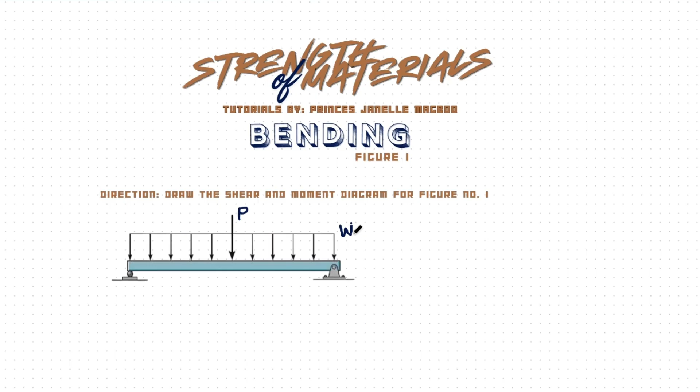So before everything else, let us name the loadings, reactions, and all of the necessary components of this diagram. Since this is a point load, let us label it as P. Next, we have here our distributed load, uniform distributed load. So we could call it W0. So we have the length here. Let us label it as L.

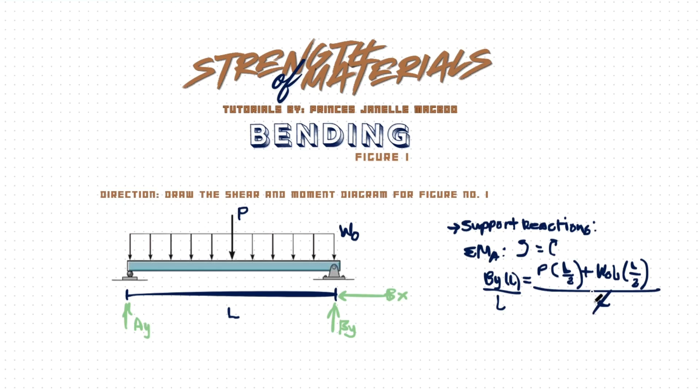Then, we'll have BY is equal to P plus WO L over 2. So, we already have the value for our BY. Ano? So, kailangan pa ba natin i-compute si AY? Well, if gusto niya i-compute, we're free. But then, as we have a symmetrical figure, it could be assumed here na yung value ni BY is also equal to AY. So, lagyan na natin dito na equal din siya kay AY.

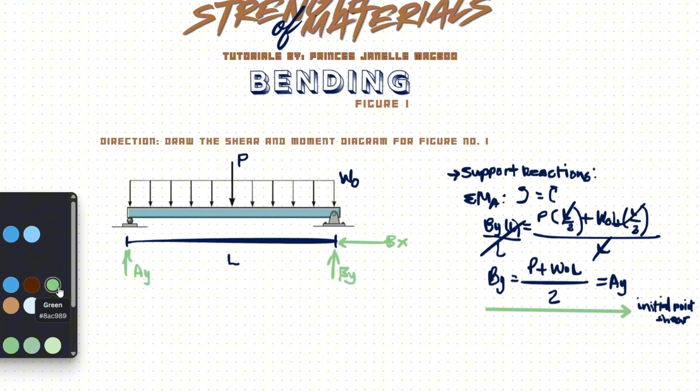So, we are now going to proceed to our shear equations. So, before that, what we have to do is to make a free body diagram for both sides of this figure. So, bakit po kailangan pa natin gumawa ng free body diagram? It is because magkakaroon po tayo ng cut sa ating figure. So, saan po tayo magkakat? When we say shear, ang cut niya daw is diagonal. So, ang cut natin dito could be like this. Okay? So, ito po yung ating cut.

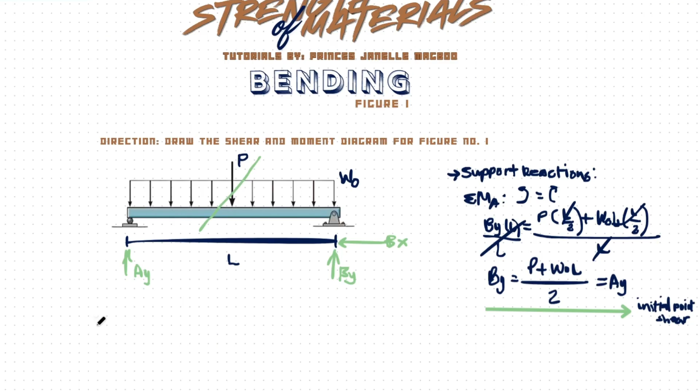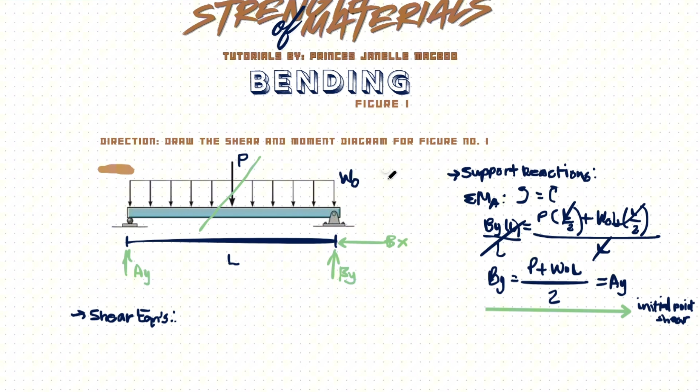And then, since ganito yung cut natin, we can have our free body diagram. So, let us label this as our shear equations kasi this will be essential for our shear equations. We'll have our free body diagram for the left side. So, ito yung left side natin and this one is the right side. Left side natin, it's going to be represented as the beam. And then, we have our reactions. We have here our AY. And then we have here our distributed load.

So, yung distributed load natin, hindi na siya WO kasi hati na siya. So, let's consider this as W. And then, ano mangyayari dito? Lalabas na yung mga internal forces natin. So, we have here our vertical and our moment. Okay? And then, our distance. We can represent this as X, or would be also equal to L over 2, since we're going to divide it naman. And then, okay na tayo sa ating left side.

Let us now proceed to our right side. Lagyan natin dito na L, and then for the right side, R. So, we have here our beam. Next, ang ating mga distributed load. And then, ang ating reaction dito, BY. And then, ang ating internal length. So, ano pang kulang? May kulang pa ito dito.

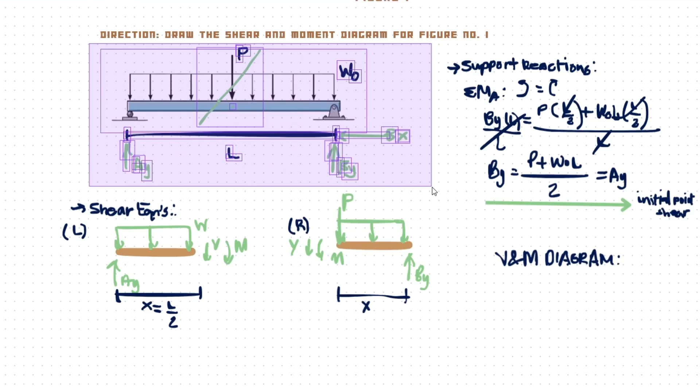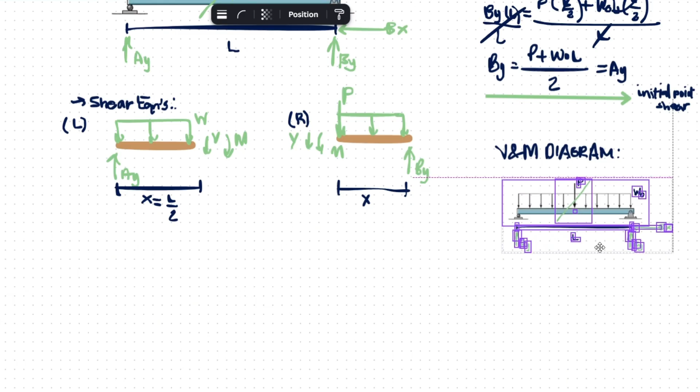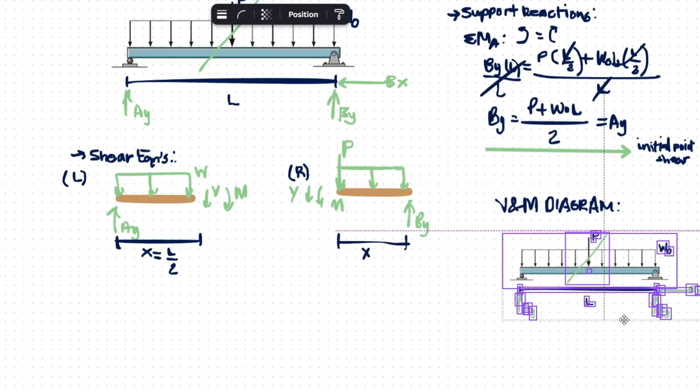And so, next, for our shear and moment diagram, pwede natin siyang i-copy. So, ito ang ating diagram. Palakihin natin siya ng konti. As you can see, nasa taas po yung ating figure. And then, sa ilalim nito, ilalagay na po natin yung linya para sa shear diagram. So, ito po ang ating linya for our shear diagram.

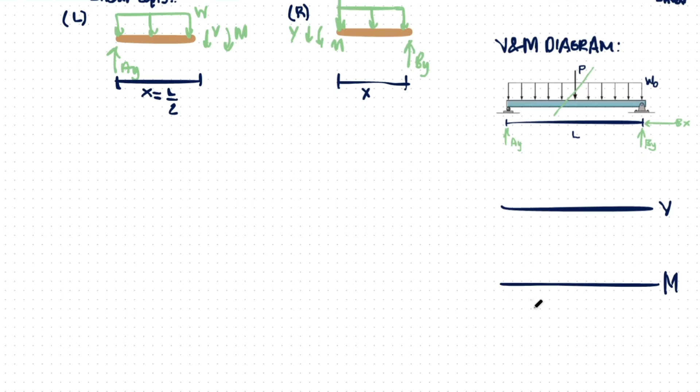So, let us call this as V. Let us label it. And then, we have our M, or the moment. So, ganyan po yung itsura ng shear and moment diagram kapag wala pa siyang nakaplot na mga coordinates. So, later on, as we go on to our solutions, mapi-fill in na yan yung ating diagram.

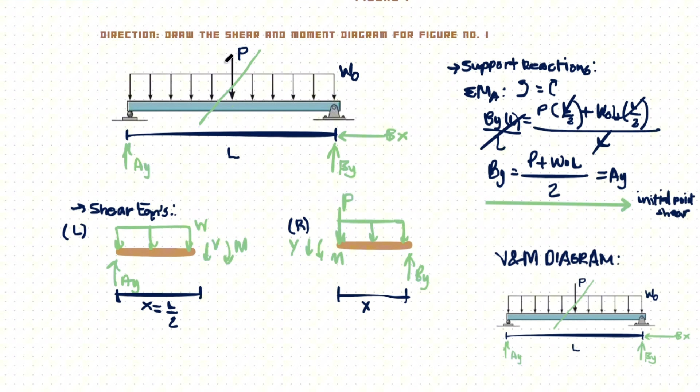Lagyan na natin ang coordinates. For now, let us proceed sa ating shear equations. So, ang kaibahan nito sa mga other examples natin is meron tayong given na point load. So, dito, hinati na natin both sides, and by paghati natin both sides, magkakaroon tayo dito ng solving for the equations of both sides din. Kasi, para makonsider natin paano nagbe-behave yung one side and then the other side as well. Kasi, yung point load natin is nasa gitna.

But if the point load is here, then that is just the same thing. Ang i-consider lang natin is, laging kapag may point load tayo, kapag nag-cut tayo, dapat makonsider lahat ng mga reactions and then the loads na given sa atin. So, dapat both sides, gagawa tayo ng equation para makonsider ang behavior ng ating diagram. So, for the left side muna tayo. Left side ng ating shear equation. So, lagyan natin dito left side.

Ayan, parang hindi tama dito. And then, ang left side natin, i-analyze muna natin ito. So, since ito si X, dapat yung V natin, ito yung V. So, yung value ni V ay makuha natin through summation of forces. But then, we also have to consider itong ating distance. So, paano natin gagawin yan? I-analyze natin yung distance natin na L over 2.

So, meaning yung X dapat mas mababa siya kay L over 2. Meaning, hindi siya dapat lalampas kay L over 2, but also, greater than or equal to 0 para ma-achieve natin ang right slope ng ating diagram, okay? So, we can have a range here. So, 0 must be less than or equal to X, and X must be less than L over 2. Well, it could be equal then.

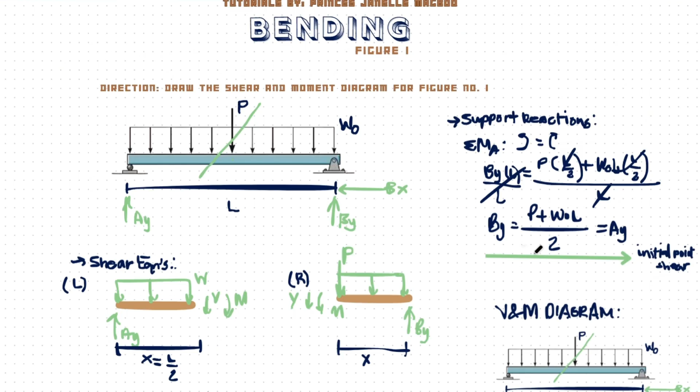But, we also need to substitute the value of AY. So, ano ang value ni AY? Balik tayo. Sabi dito, si AY ay equal kay BY, which is P plus WoL over 2. Okay? So, rewrite lang natin siya. So, we'll have V is equal to P plus WoL over 2 minus WX.

Okay, so meron na tayong shear equation for the left side. So, pwede natin siya pangalanan as, ayan, ito na lang, itong ating equation.

So next tayo. After ng left side natin, pwede din tayong mag-consider ng ating before midpoint na coordinate. Kasi, hinati natin siya sa dalawa. So, we can have here x is equal to L over 2, since i-consider natin yung midpoint. So, let us just label this as before midpoint. So, we can substitute x to L over 2. Kasi yung gitna yung hahanapin natin.

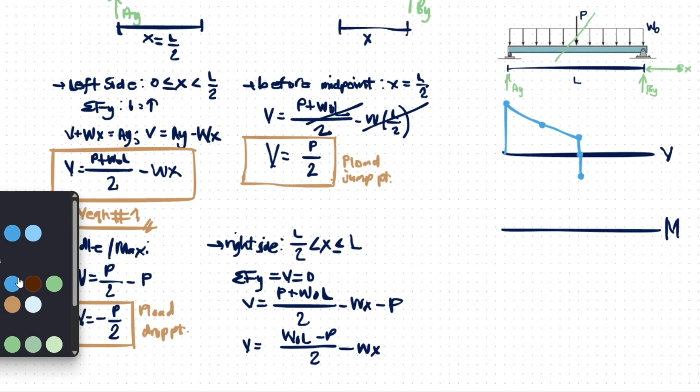and then, there, that's our V. But we can also simplify it further. So V is equal to - what is our V? We have W OL minus P over 2, and we have minus W X. So this is our shear equation number 2.

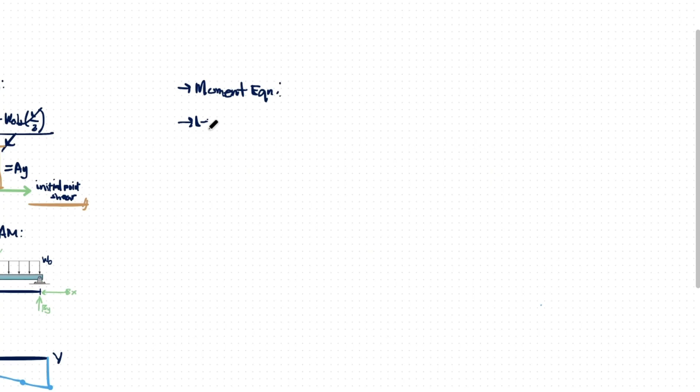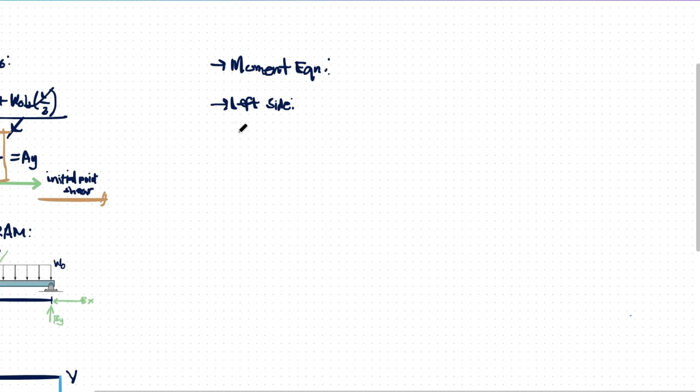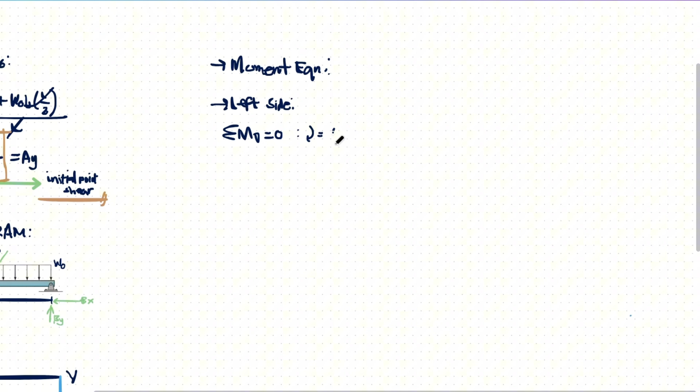Summation of moment. Saan tayo magsa-summation of moment? I-equate natin yung moment sa zero, para makuha natin lahat. Summation of moment is equal to 0. Pero pwede rin na clockwise is equal to counterclockwise. So, magsimula po tayo dito sa ating left side.

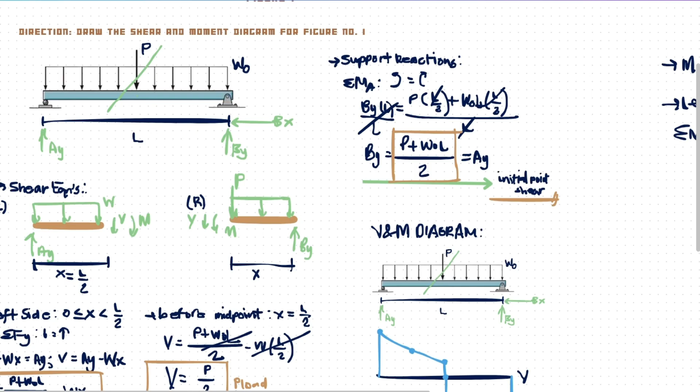Kung nalilito kayo, para makatingin kayo sa diagram, kopyahin na lang natin itong diagram na ito. Pag ganito yung M natin, clockwise siya. So we'll have M. Diretso ko na lang dito kasi same lang ito ulit ng sa SRB natin. So M, let us add

our W times X. Ang distributed load po, baka malimutan niyo, ito. Okay? I hope gamay niyo na kung paano mag-consider ng mga distributed load. And we'll also have our X over 2.

Kasi lahat po ay downward na. So we have here yung AY natin, which is ito po, kopya. P plus WL over 2. Ayan, at ang distance niya, X, ito po ang distance niya. Times X. And then just simplify.

Sisimplify ko na po siya ng diretso, alam na naman tayo mag-simplify. So we'll have M is equal to... ayan, so ito na po yung ating simplified version. Baka malito kayo, ang ginawa lang po natin dito is transpose at pinag-combine. So naging negative na siya, sa halip na maging plus, naging negative o naging minus.